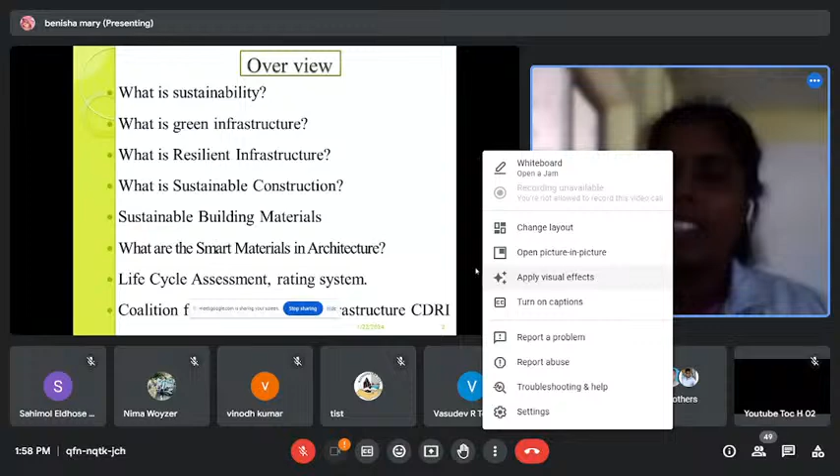As an overview for this presentation, I'll give some topics I'm going to discuss: what is sustainability, its definition and related terms; then we cannot have a sustainable field without nature, so I've included green structures and what is green infrastructure; next, what is resilient infrastructure and what is sustainable construction. When we learn sustainable construction, we have to know about sustainable building materials, and if it has to be resilient, we have to talk about smart materials in architecture. Finally, life cycle assessment, rating systems, and coalition with other related terms — everything I have planned to discuss.

So next, we can start with what is sustainability. As we are all familiar with the word, simply we can say that we are providing a base for the future generation, so they can experience and enjoy what we are experiencing and enjoying on this earth — clean air, clean water, and other natural resources. If we over-exploit the natural resources granted to us, future generations cannot have that. This is the aim behind concerned usage of natural materials.

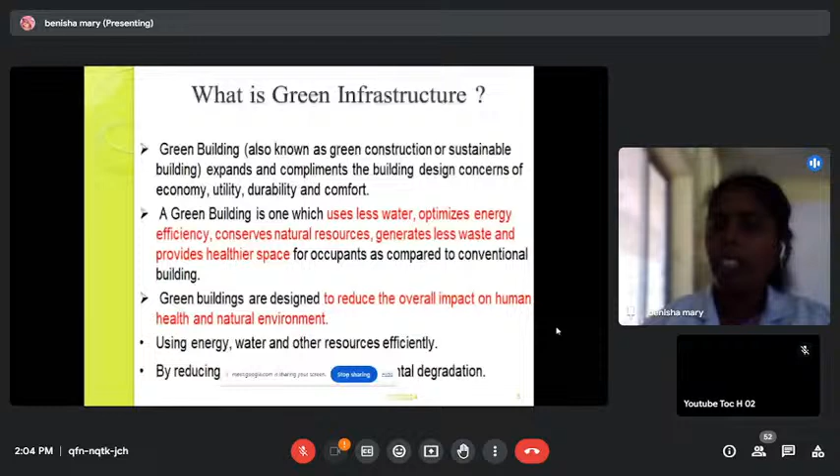It's not only our residential houses creating pollution - we have to think about industries and other infrastructures that are constantly polluting the land, air, and water. This is how green building impacts the environment. So while constructing, we have to focus on whether the building is affecting the environment.

During construction, we have to transport material from far places to the location, and we have to use fuels. During construction there will certainly be wastage of material, so we have to pre-plan how to efficiently conserve those useful materials.

And while doing that - occupation, then renovation. When retrofitting or renewing something, there also has to be a reduction in energy use. And at last, every building has some lifetime, and after that lifetime it's not possible to serve the function it was made for, so there has to be demolition.

While demolishing the structure, there will certainly be waste. So planning for that - how to recycle and do it efficiently - these things will make the building green.

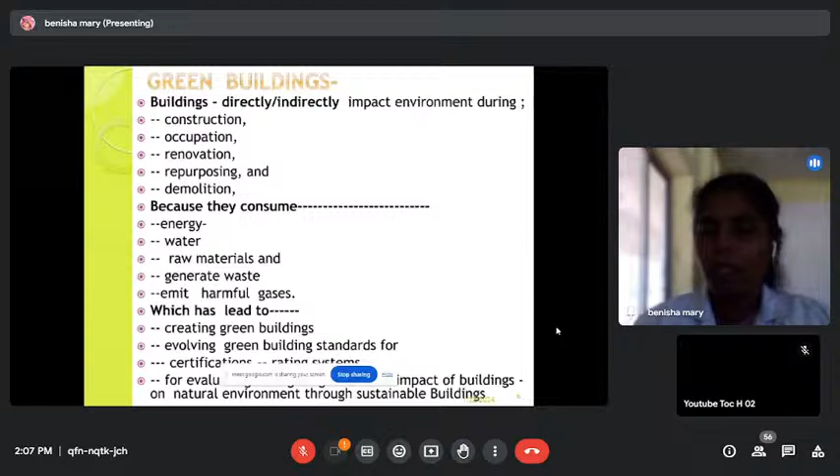When I say rating, it is LEED certificate - Leadership in Energy and Environmental Design. When we make a ranking for every building, LEED certificates are the famous one. There's also Green Globes, model green home building guidelines, and Build Green - these are all the standards. When we focus on this and build our structure accordingly, we can obtain a green infrastructure.

So next, the topic is not only sustainable green infrastructure - we also have to learn what resilience, or resilient infrastructure, means.

According to me, resilience is very important, because the structure, when met with a disrupting event, should not just fail suddenly. We have planned for its lifespan, so we cannot leave the structure to fail and collapse due to an event happening for a second, like an earthquake. If you plan for an efficient way of reusing, or mitigating the effects, that will be very good. So resilient infrastructure is something we have to concentrate on more in this current scenario.

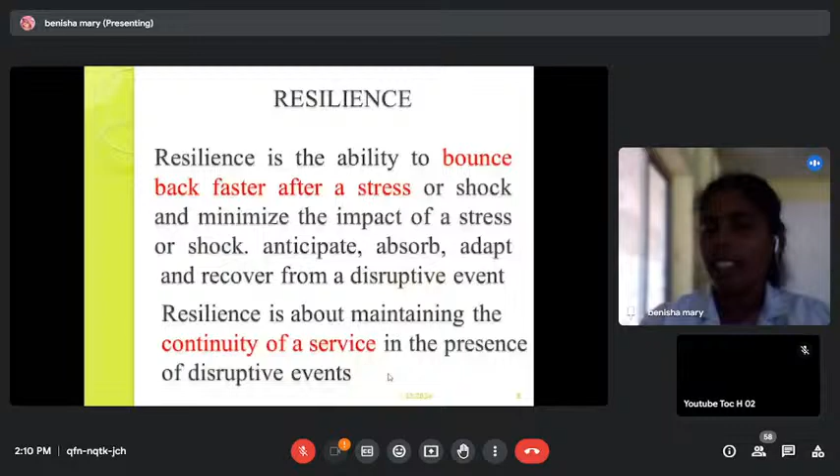Resilience is about maintaining the continuity of service in the presence of disruptions. So we are making the structure continue its function, staying safe from disasters. I will list what disasters are going to interrupt our structure. Those things have to be absorbed, and it has to react to its stresses. That is resilience.

Later on, if the stress is more, we have to make a way to protect - so it is not only preventing, we have to protect, then mitigate. Still, if it is not possible to protect and prevent, it must be in a way to reduce. These are all the things we can do before the disrupting event.

During the event, it should not fail or collapse. It should not lose its own stability. It has to respond - responding and reacting to the stress and shock which is happening suddenly is very important.

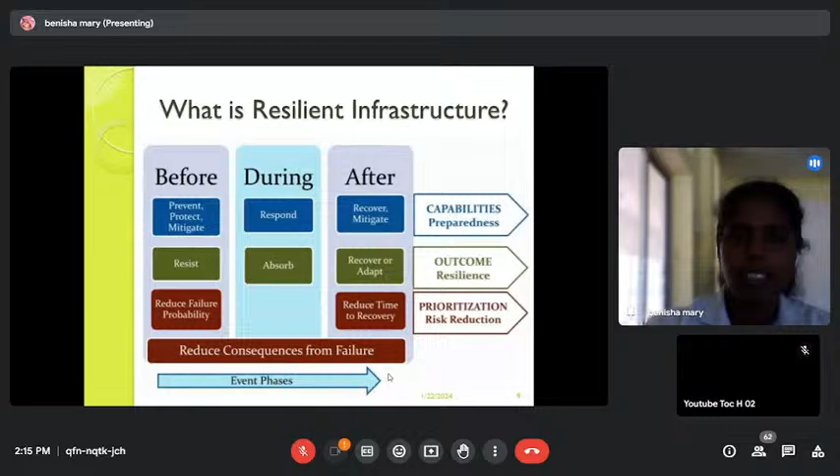Okay, now I can introduce some importance of sustainable construction. We are talking about sustainability, we are talking about resilience. So why is it important? Why suddenly do we have to change our traditional way of designing and constructing? Everything is going as it is, right? So why is it the time to think about a change in the way we design and implement a new construction or infrastructure.

Yes, it is certainly a critical time to think about our traditional way of designing, the usual way of mixing material and consumption. Everything has to be stopped, and there has to be some new thinking in infrastructure development.

So why is it important? It's about bringing a quality environment. We can have the air and water quality degrade, and then and there we are seeing a polluted environment with no possibility of rectifying it, and more human effect. It is giving an impact to our whole life. So what can we do as civil engineers to improve that or reduce the effect? Something has to be done.

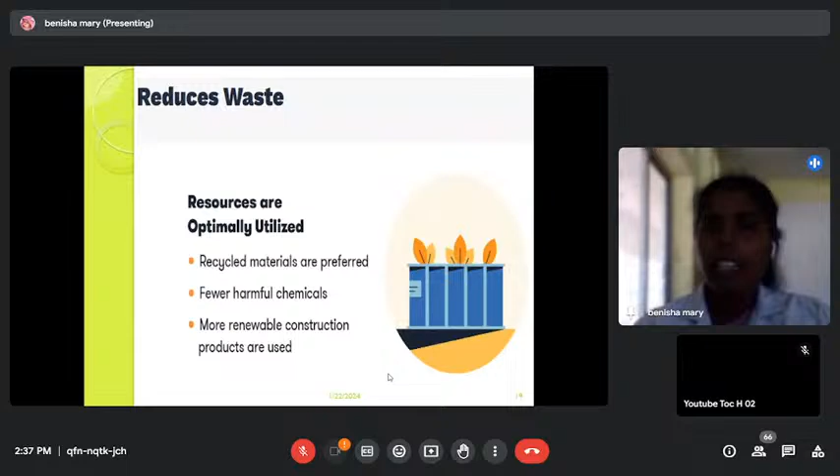Then reducing waste - the chemicals and toxic gases get reduced. Certainly we can improve the economy. How? Demand for labor increases. If an engineer is skilled in constructing a green building, a sustainable, resilient building material, certainly the demand for labor will increase, and we can boost the economy by implementing those projects.

Then it promotes sustainability - people can see how efficient everything is using renewable energy. It is promoted, and then we move forward in this stream.

As I mentioned previously, there will be a challenge when we change from the conventional method to a new construction method. So what is the challenge here? It focuses on taking time and preparation to utilize the best practice. It is not easy to learn the methods, or learn how it is designed, or how it can be used as a building material - it takes time.

That is the new trend. Everything has to be taught by us as teachers. As teachers, we can introduce those things to our students so that they will be benefited and know about these sustainable materials.

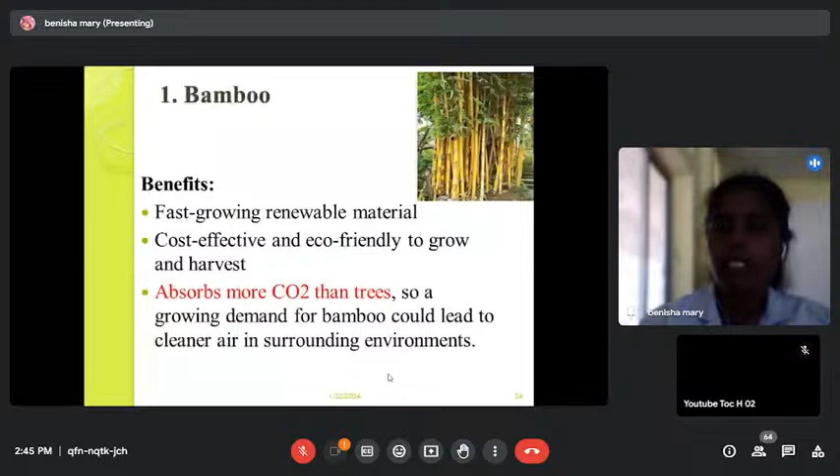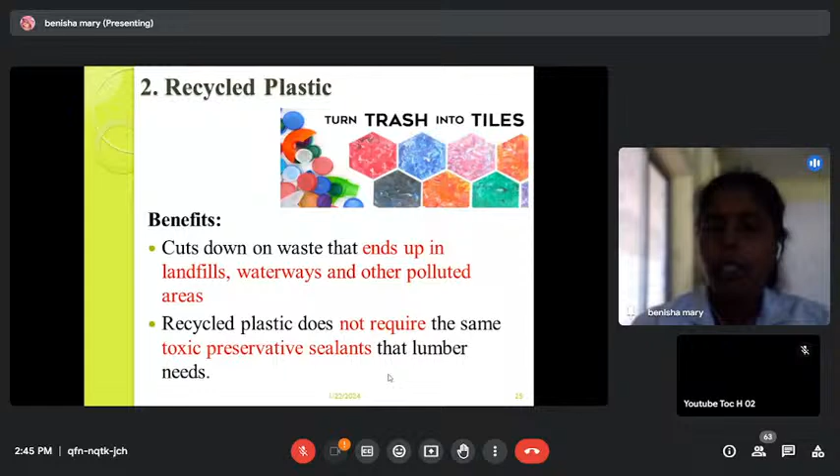Then recycled plastic. Here also we can end up filling the lands, we can end up polluting water with the plastic. It can be recycled. It doesn't require a toxic preservative or sealant to connect, so it is easy to connect and make a sustainable material.

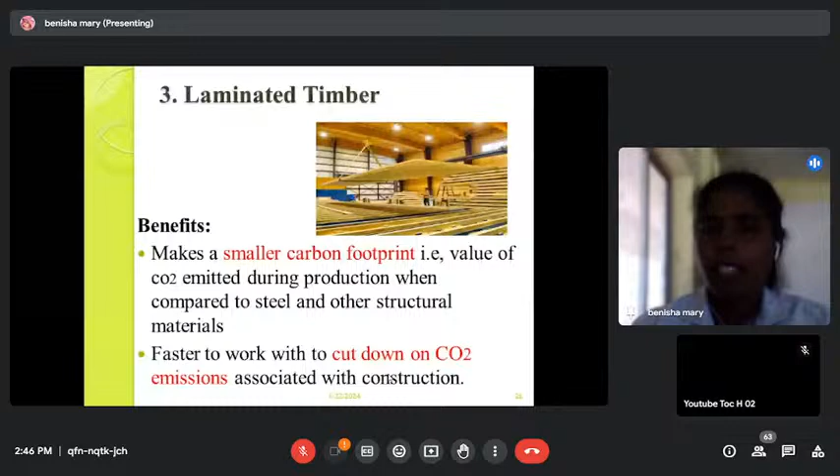So this is the laminated timber, we call that cross laminated. The strength of these timber blocks will be very high, so that we don't want to cut down the trees.

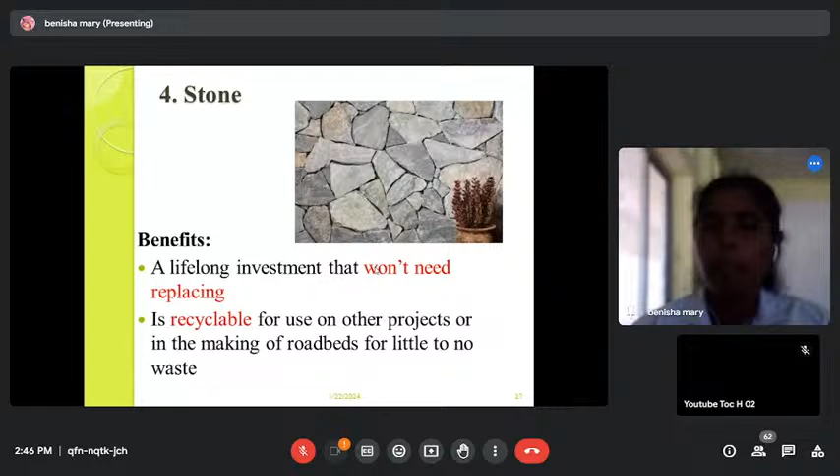Stone. What is the main benefit we can point out? It won't need replacing. If it is a brick or concrete, somewhere after years it is going to lose its shine or lose its surface particles. But stone is a sustainable unit, it will not need any replacing, and is recyclable for use in other projects. Once a compound wall made of stone is demolished, the same unit can be used as foundation blocks, so it can be recycled very easily.

I told about cob. It is a mixture of lime, sand, straw, and soil. It is inexpensive, produces less carbon dioxide, and you can see the units like a fresh mixture. That will help you with insulation also. It is an eco-friendly material.

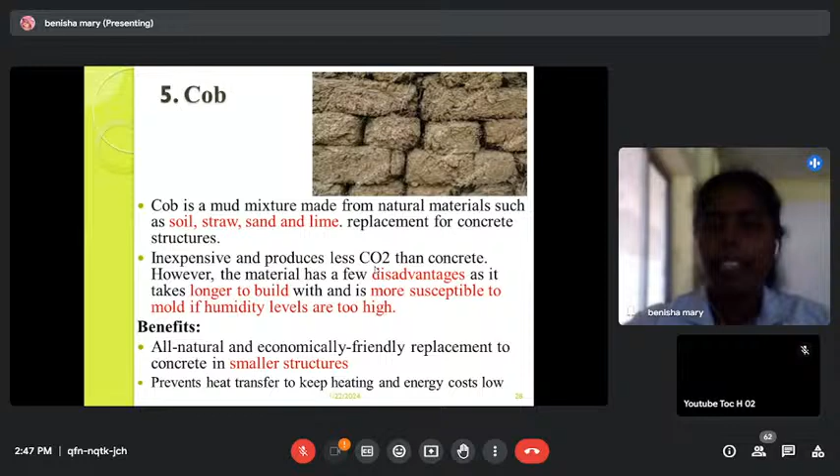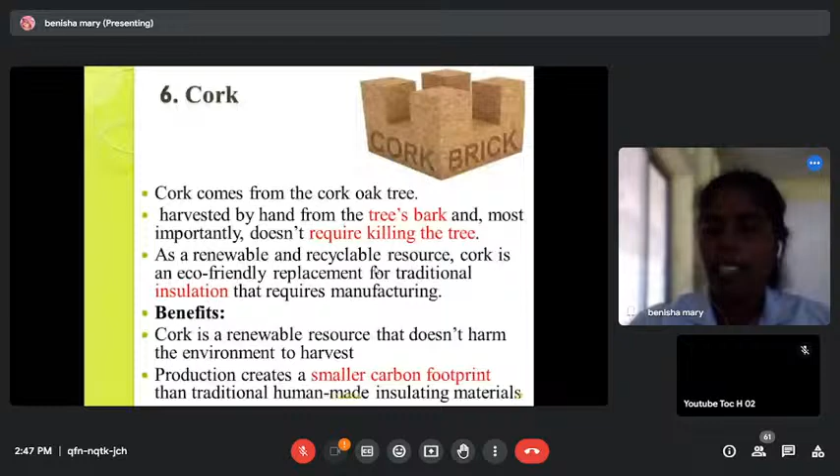The cork block bricks, the benefit we can say is smaller carbon footprint. The emission of carbon to the environment is very less when it is a cork, while production of a regular brick has high carbon footprint, it has to be burned in flame, treated, uses water, everything is made. But this cork is weightless, so it can be used for a less weight building material. Then adobe brick is also the same, the mixture is dried in the sun and those blocks don't need any heating.

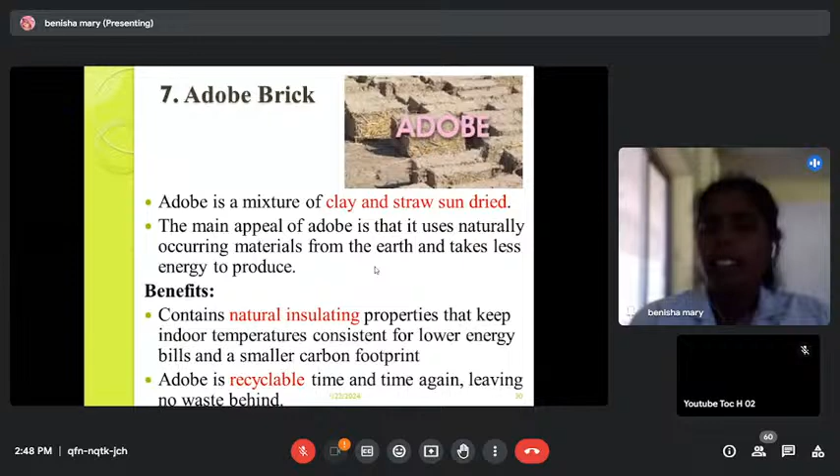The benefits we can say are natural insulation property and keeping the indoor temperature consistent. So when we enter into a hut or an olden clay walled house, we experience a good condition, the indoor temperature will be very less, but we couldn't sit inside concrete high-story buildings. It is all because the insulation property of this concrete is less, but it can be achieved by adobe bricks.

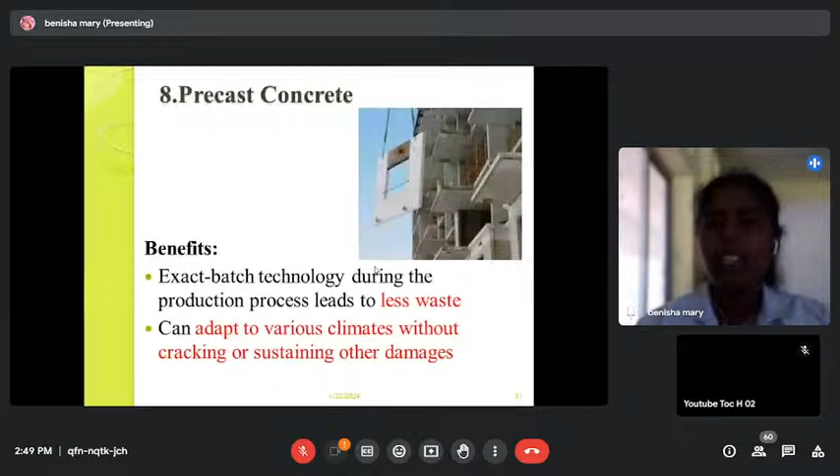Precast concrete: we have to cast the elements somewhere in a factory or laboratory, then at once we can build it to the required shape. It can be transported and then uniting it into a block is possible.

Then pollution absorbing brick. This brick will absorb the pollutants, the small particles mixed with the air. So that will give a good space for the inhabitants.

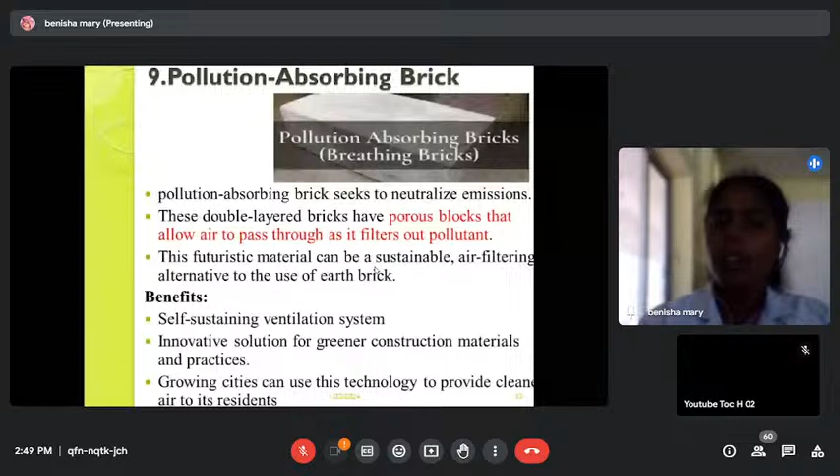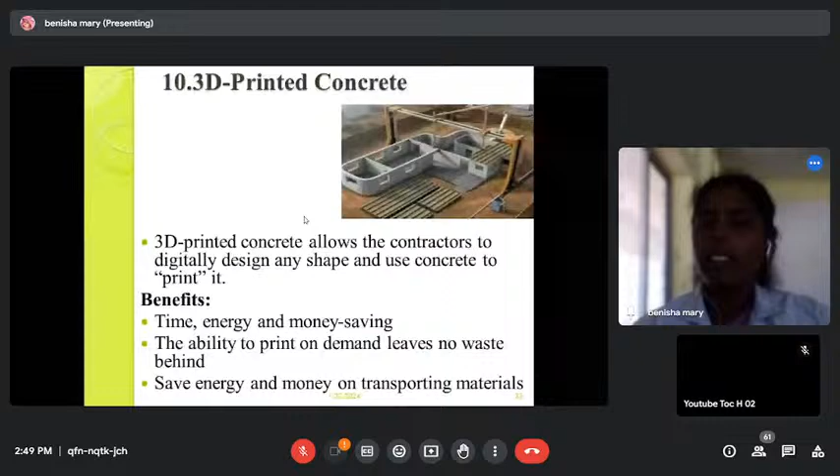Then this is the 3D printed concrete. So you don't have any wastage of material. It is all done in less time, saving money, the energy, everything is less. It has the ability to print on demand, leaves no waste, saves energy, saves transporting material. We don't want to walk here and there to transport, purchase, nothing. We can just design and then give time for it to build.

So this resilient material can be added in the smart material category also. These are some of the new materials I have listed here, which work very smart, very resilient for the stresses. So one by one we can go through it.

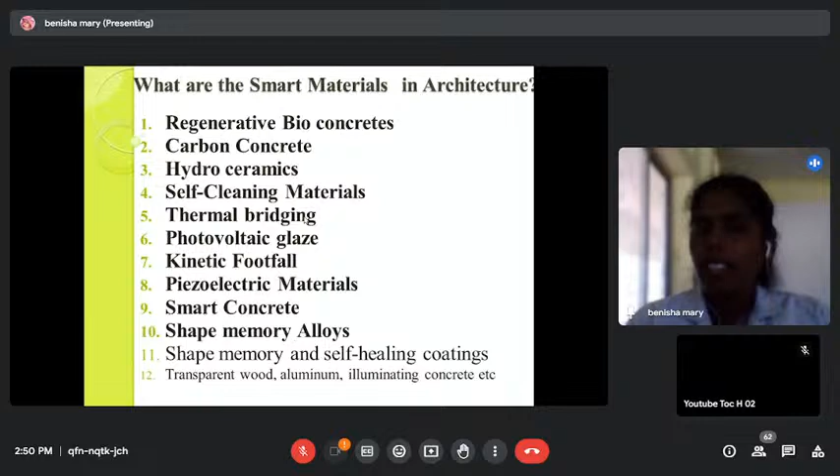Regenerative bioconcrete, or living concrete, we can say. So how to make the concrete live? By mixing a bacteria called bacilli. So what is the need of a bacteria there in concrete? We know concrete is a brittle material.

It is prone to cracking and shrinking, so there will be cracks. Crack is the main ill effect it is giving. So how automatically can the major and minor cracks be filled? Even a micro crack, not at all visible to us, what is it going to do? If it is cracked, it allows moisture content, water, everything into its medium. What will that cause? It will cause corrosion to the reinforcement embedded in its matrix.

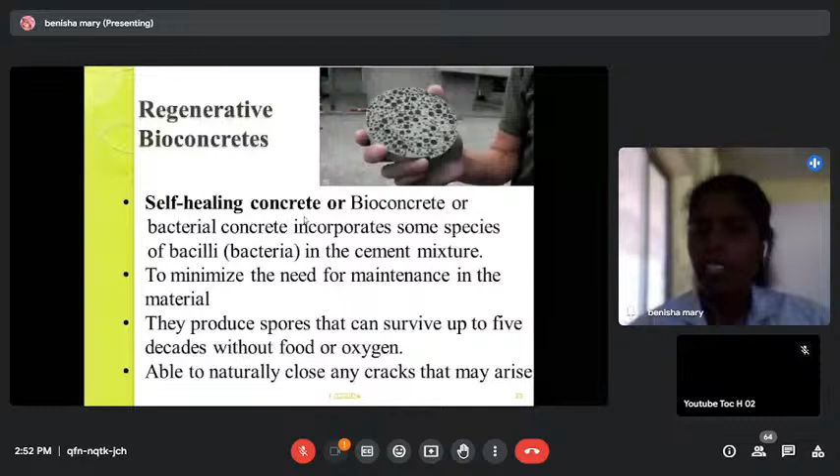So how can this automatically be fixed? There is a bacteria which is going to help us by creating lime, which is going to fill the micro cracks created then and there by stresses inside the concrete. That is a good one we can use as a sustainable material. It will survive for 5 decades without food and oxygen. We can think about implementing these things in our future projects.

Next is carbon concrete. Here we are using strands, fibers made of carbon. These meshes we can use instead of iron elements. What is the main benefit of ignoring iron elements? The reinforcement gives high dead weight to the structure, so the self weight of the structure itself is a big task to manage. When the self weight of the structure is brought less, what happens? The strength of the structure is going to be compromised. So what to do in order to have a strong building element that also serves its function, holding heavy live loads, dead loads, wind loads, earthquake loads?

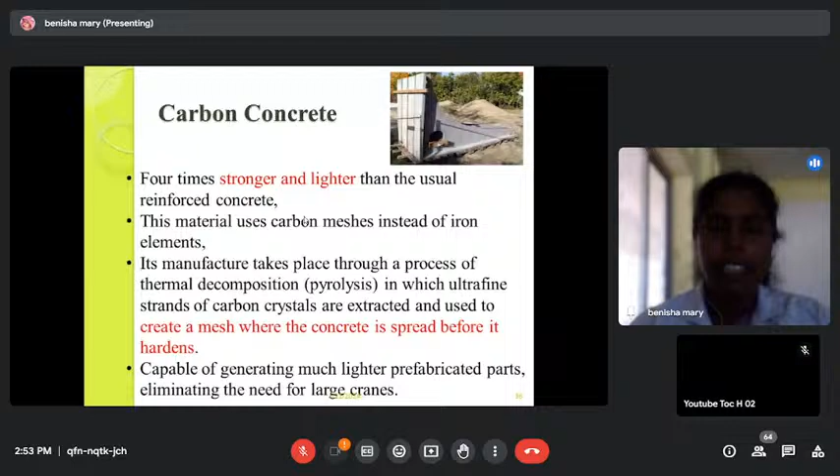So there is a material made of carbon. These carbon fibers are made with the concrete, as a mesh we have to spread before hardening, so that this material will help us make a sustainable concrete. The carrying capacity is also good, and the thickness of the elements can be brought lesser. A big dam you are going to construct, a bridge you are going to construct, there is no need to fear high thickness or diameter - it is possible with fine elements.

Then hydroceramic. There are more trends implementing hydro, water. Water particles can be absorbed by this concrete - it is mentioned that 400 times more than its volume of water can be absorbed by this concrete. So what is the use of absorbing water or wetness? It can be served as a thermal insulator.

When the surface is very cool, the structure does not require comforting energy which depends on power, such as air conditioning or a fan. So those things will be less needed when it is made of a hydroceramic material.

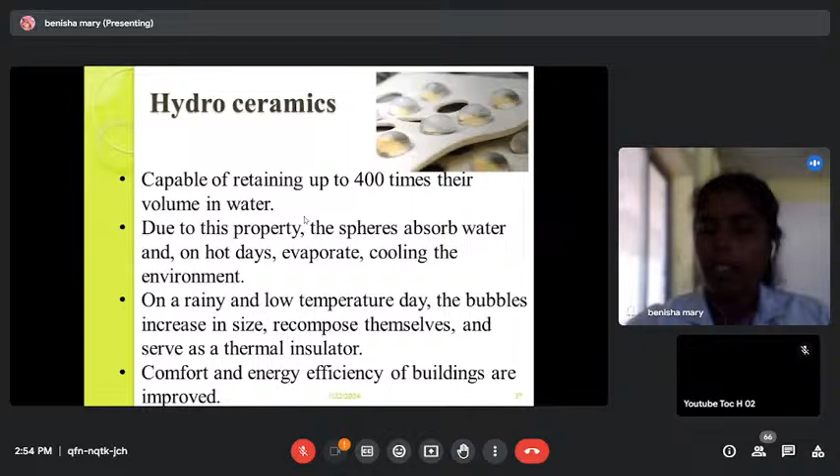Now let's talk about self-cleaning materials. Is it possible for concrete to clean itself? Yes, it can be done by adding titanium dioxide. When titanium dioxide ions react with particles in the presence of sunlight, it emits nitrates. These nitrates can kill or absorb the dirt and improve the surface process. This has been implemented and proven to give a 51 percent reduction in polluting gases. It can also be applied as a paint on the surface of concrete so that the structure becomes dirt free.

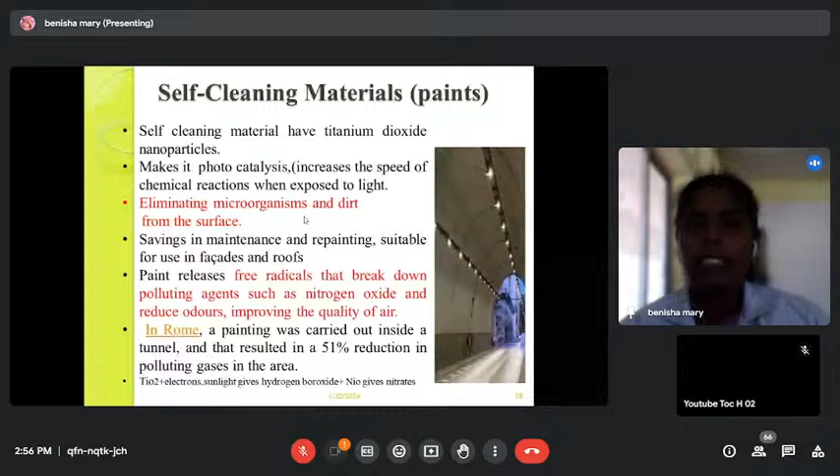Next is thermal bridging. What is thermal bridging? The sun's radiation troubles us a lot - we get heat inside immediately when radiation contacts the surface. Is there a possibility of limiting it with an insulating material? Yes, that is thermal bridging.

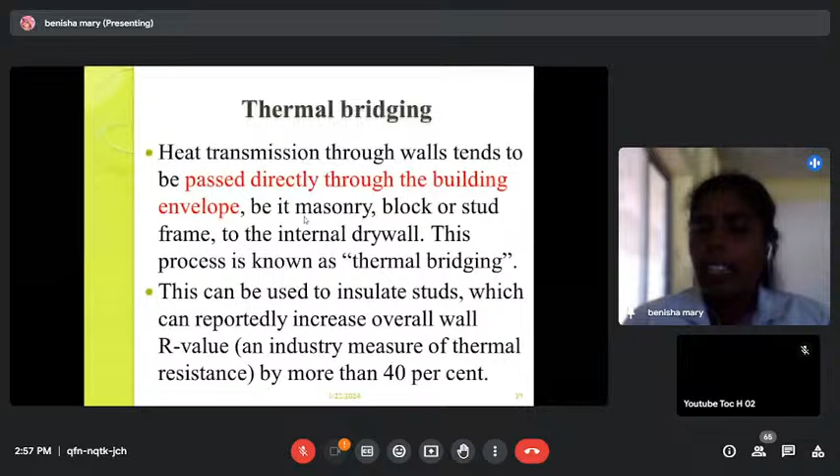Thermal bridging works as a layered element, with two or three layers. One layer is made of insulating material, and between that and the first layer there is some free space. This free space does not allow the radiation to pass into the indoor space. So that is a benefit, and here the R value, the thermal resistance value, can be increased by more than 40 percent. This is the thermal bridging element.

Next, photovoltaic glass. Why do we adopt glass? In order to allow light to pass while not letting hot radiation pass. The heat is absorbed by solar panels, and it can still be made transparent. We can make this photovoltaic glass very transparent so it does not allow heat to transmit, but that heat is used as efficient energy for producing electricity. This is practiced in many useful structures, done in windows, facades and roofs, making sustainable use of this glass.

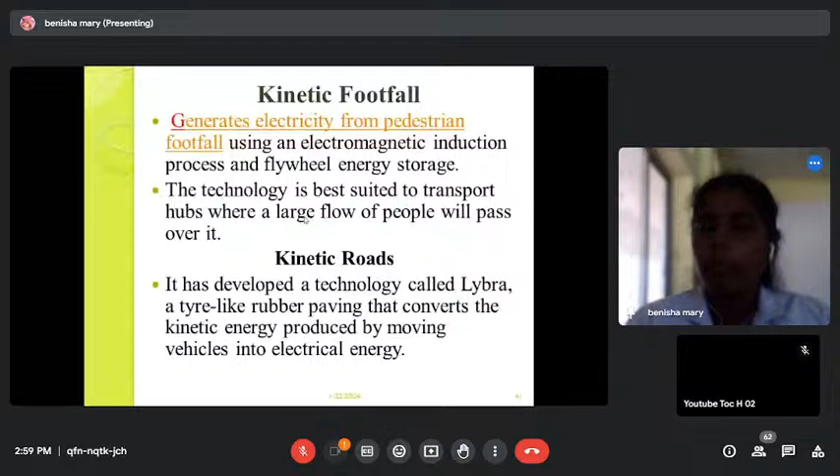Next is kinetic footfall or kinetic roads. The load given to this material is converted to electric energy - it generates electricity when we pass by. Vehicles passing on a road made of this material automatically generate electricity, which can be used as a street light source or for recharging electric vehicles. So when used as a road material, it can certainly function as an energy producing unit.

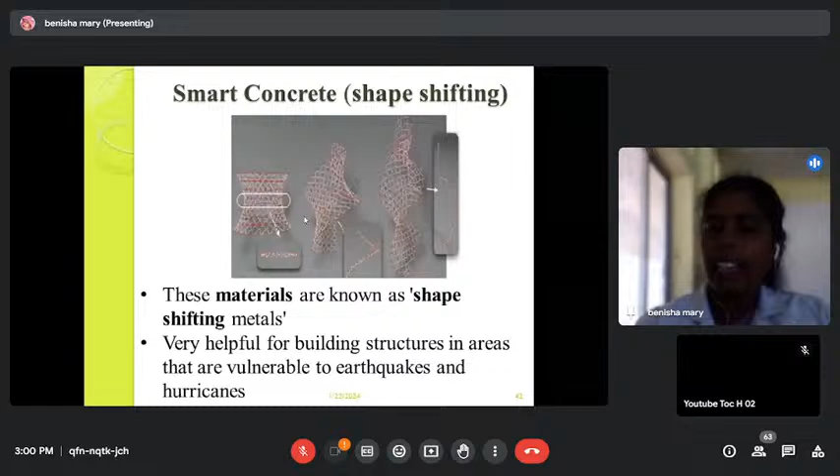Next is smart concrete. We call concrete smart when it has the property to change its shape. This shift is not made frequently - it happens when meeting a heavy force or heavy wind. Such things can make the structure shift, so it can efficiently handle wind pressure and wind load when its shape changes, for example to a cylindrical form. It automatically senses forces or loads and is molded or changed to a shape that can deal with adverse environmental disasters. It is implemented in earthquake-resisting areas or hurricane-prone areas, where it is effectively used.

As mentioned about concrete producing electricity, that can be used effectively. Concrete can also be smart when the original raw materials are added with potassium ions, giving it a capacity to store electricity for a long time. What they propose is that one day an engineer can build a wall which can store a lot of energy and be used as a battery to serve power needs.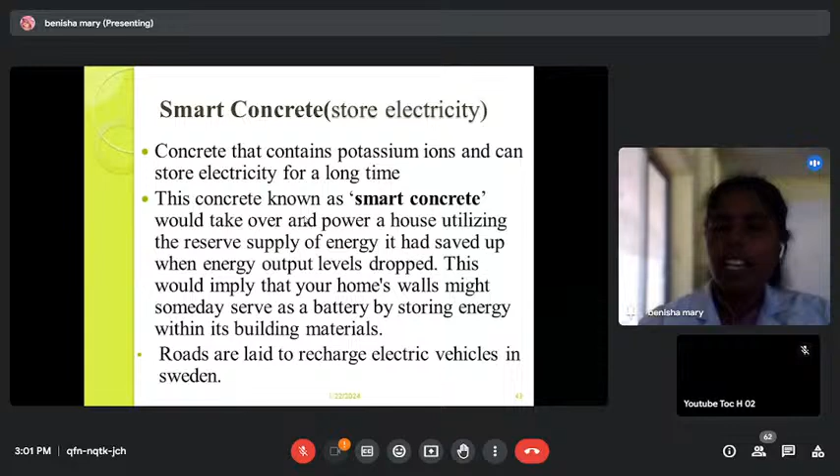Okay, it is all possible. So that is a smart concrete.

Then shape memory alloys, a resilient material. These alloys are a mixture of metals. So here we are using Nitinol, nickel-titanium, copper, aluminum.

We have heard about base rollers, so base isolation materials. When these materials are adopted at the foundation, they will change shape as needed and regain the original shape when sensing normal temperature.

The material can sense temperature, humidity, pH level, light, wind, and stress. With this effect, they have the capacity to change themselves, which will be a useful material for us.

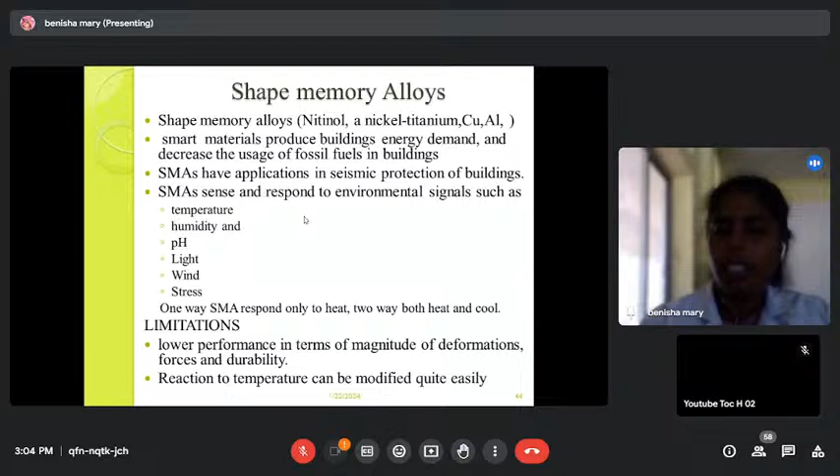Next is the reaction to temperature can be modified quite easily - it is much more difficult to control the response to temperature. So that can be added as a limitation. This is all about shape memory alloy.

And when the temperature gets normal, what happens? It will memorize its previous shape. What is the previous shape? A horizontal one. So it automatically goes back to the original shape.

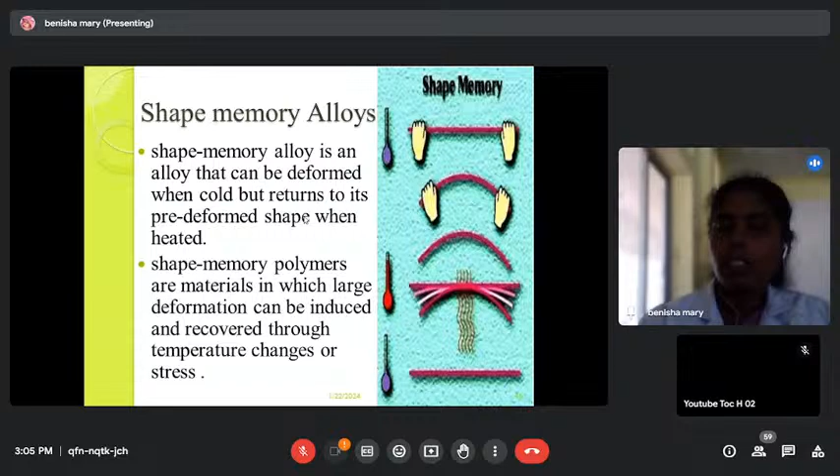So that is going to be implemented as a sustainable material. How is it effectively used in our field? What effect do we experience in concrete? It goes cracked.

So those cracks in the concrete can be restored when we paint or coat this shape memory material over the surface of the ordinary building unit. This is much more helpful when it is added with an elastic polymer network. It is possible for the structure to reform and come back to its original natural state without any cracks, made possible by the self-healing material.

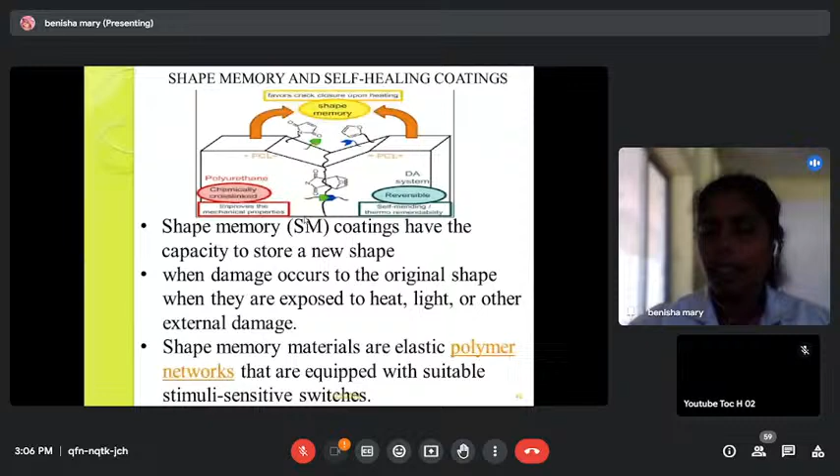So here they are giving an example of an automatic material, that is shape memory alloy material. It is used as a...

...shoe. So when we want to wear the shoe, the temperature has to be increased. What will happen when the temperature is increased? The element gets loose and it can be worn like a sock - a flexible one when it is heated.

Later, when it continues with our own climate and body temperature, it becomes rigid. So when a flexible material becomes rigid, it acts as a rigid shoe. Later, by increased temperature, it will be flexible again - it will again have the capacity to be flexible.

So such kind of innovations they are making with these smart materials. We can also implement this in our civil engineering projects.

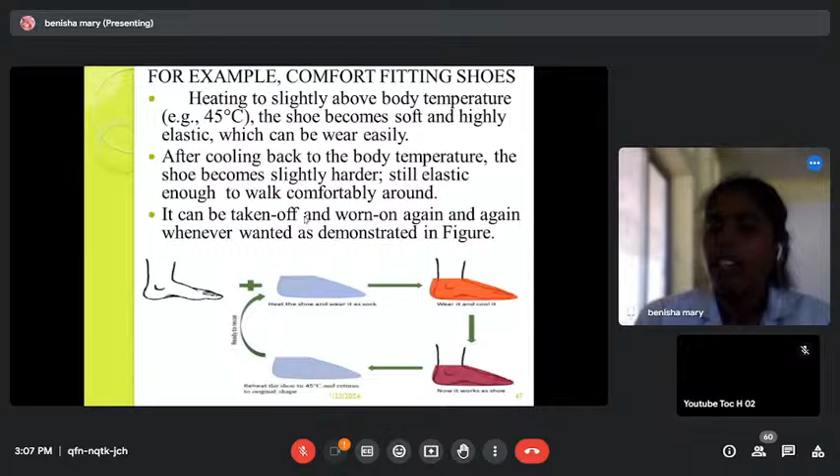Yes, so it is time to discuss about life cycle assessment. So what is a life cycle assessment?

That is, it is analyzing a material. So if I am suggesting some green material like an adobe brick, we have to analyze what are all the raw materials here, how it is extracted, how we have to transport it to the site, how we have to build it, how we have to produce it, and then what is the lifetime, and after its lifetime, how it is going to be demolished. Why demolishing? Is there any impact to the environment? And is it possible to recycle the material?

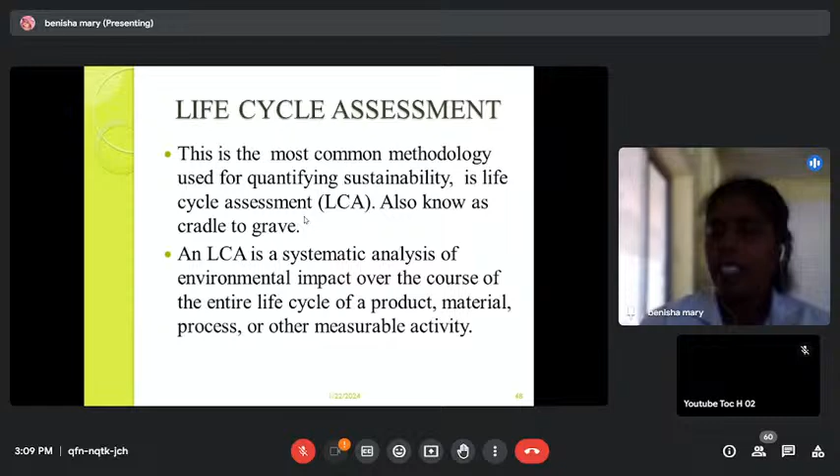So if you are fully analyzing the material starting from its origin to its demolition stage, then it can be rated. Based on the impact the material gives in each and every phase, it can be rated. So the material which gives less impact scores more, right?

So here a flow chart I can show you. This is a cycle of a material that repeatedly happens. The first thing is raw material is extracted. Then the material is produced - it can be produced as an I-section or element. Then it has to be manufactured. Then it has to be utilized. After the period of its service, it has to end its life. Then afterwards, it has to be recycled. So analyzing all these terms, then we are grading a material - that is called a life cycle assessment.

I can compare brick and adobe blocks. So while comparing the LCA of brick, what happens? We have to collect the clay material and use a lot of water. Then it has to be burned. So the carbon footprint or the usage of fuels, everything is more. And then after the service, it cannot be reused, right?

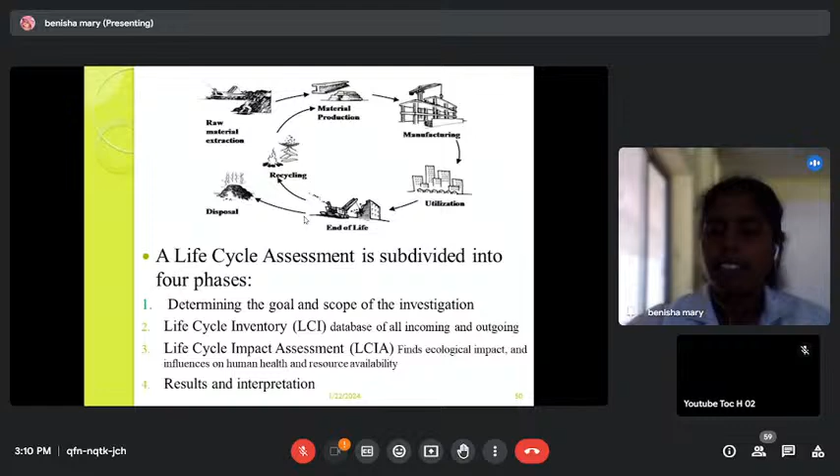So what is the output? The output is the emission of air, the emission of water, the emission of pollutant to the water, emission of pollutant to the land. So these are all the input and output. The input has to be used less, and the output has to be released less.

Is it during the cycle? What is that extraction of raw material? If iron usage is more, mining is needed. In order to get the ore, metal iron ore, we need extraction - the energy used is much. Next, processing - while purifying the iron, the processing is more. And then it is not available everywhere, it has to be transported a lot using diesel fuel for the transportation vehicle.

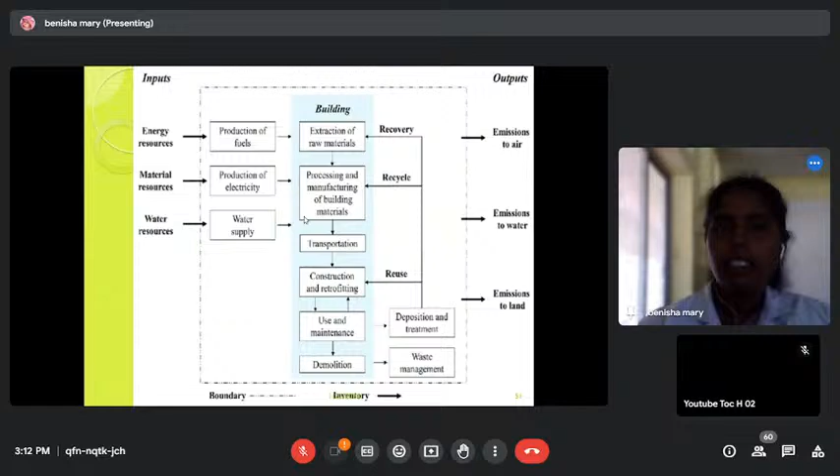Next is construction and retrofitting. So when we cut the material, there is wastage - it is not available in the required size, right? So there is construction and retrofitting wastage. Then the maintenance - it is not easy to maintain the iron element, so we need much more cost and time for maintaining, and at last, demolition. If it is easy to recycle, it is well and good, right? So this shows the life cycle assessment cycle.

Here we can discuss some principles - the outcome principle and the process principle. The outcome principle, we have to think about social, economic and environmental effect, right? And process principle, we have to think about the ethical, stakeholders and governance. So all this has to be kept in mind, and at last the performance has to be harmless - preventing harm, preserving correct values, creation of positive and restorative values, right? So all these principles are going to give us a material which is effective in its performance.

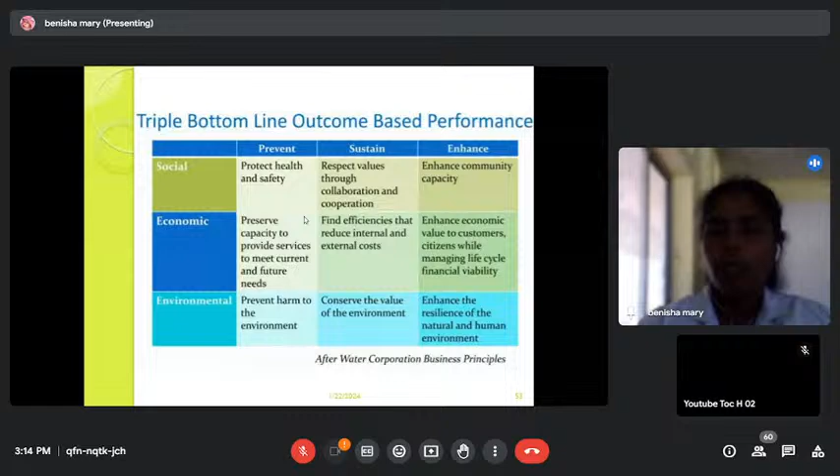So here the triple bottom line is based on the outcome based principle. We are focusing on social, economic and environmental elements, right? So how to prevent, how to sustain and enhance - it is all done.

Then the next will be based on the input basis, right? So here, ethically we have to think while preparing a material whether we are ethical to the ecological elements, right? And governance - is there any risk in managing or risk in promoting? Those things we have to check. And stakeholders, it is also important, right?

So it is sustainability metrics. When we think about the economic aspect, there is funding and land value. Do we need to encroach on the land, what is the cost, everything we have to suggest. And certainly the environmental terms like quality or compromising with the pollutants we are producing.

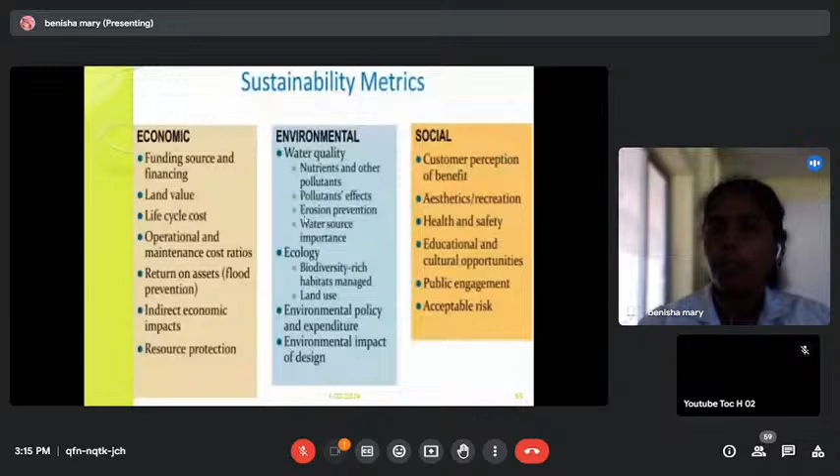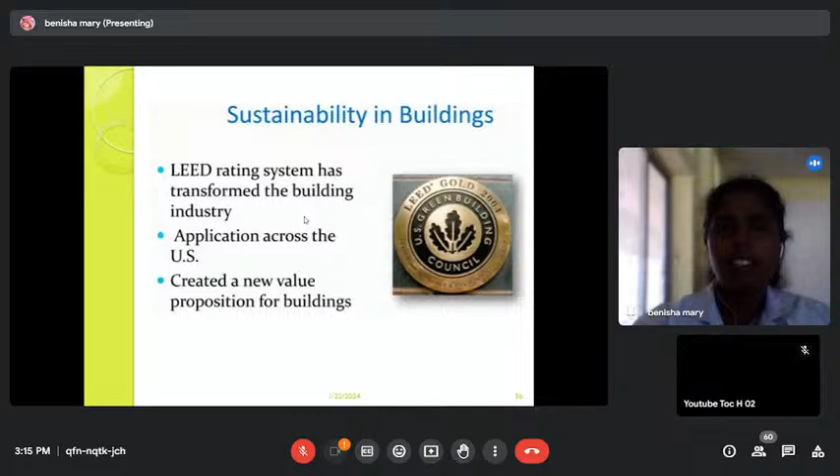How are we encouraging elements which are produced in a sustainable way? As we discussed previously about the LEED rating, when the material is performing good, the rating for our infrastructure is good, and we get reputed by the government and other organizations. So here, the green building or the sustainable building, how it is rated.

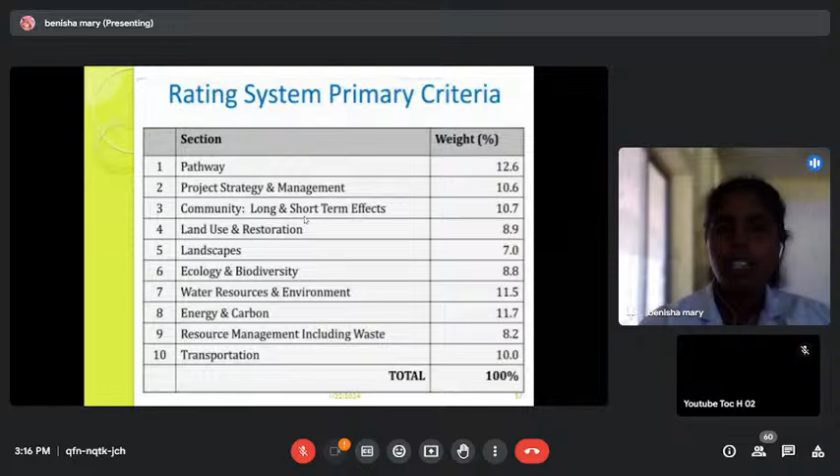When we give importance to the pathway, what percentage of weightage do we get? When it is for water resources and environmental concern, how it is made, those things will also give some weightage for our performance. If the building is getting 100 percent weightage, it is perfectly good, and we can try to score weightage for our building which is produced based on sustainable and resilient materials.

The government is also helping us to promote sustainable and resilient structures. They are planning for buildings which are sustaining and responding to events.

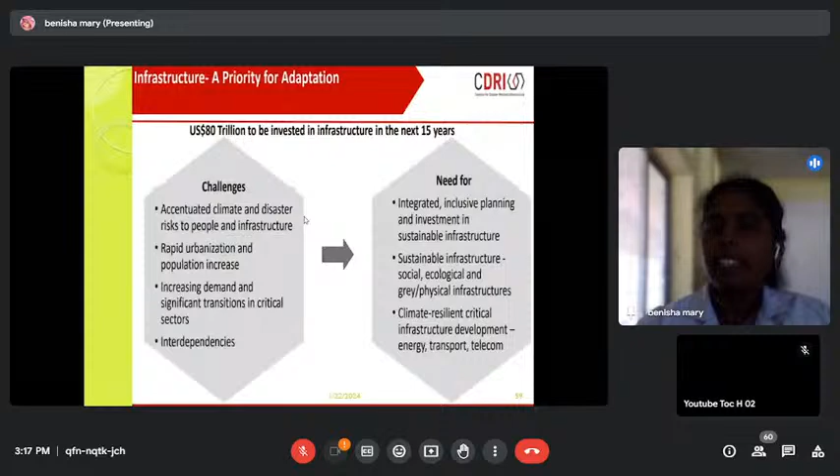What I can share is in the recent summit on 23rd September 2019, the government planned to invest a lot to make infrastructure resilient, and it is going to contribute to economic growth. They have a plan to invest 80 trillion dollars for building such sustaining structures in the next 15 years.

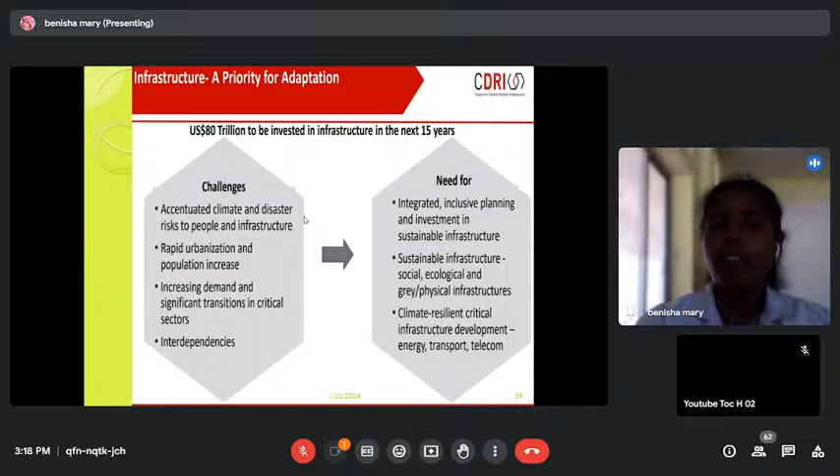So it is good news for all our civil engineers who are thinking of making a project with sustainable designs. It is good for us that the government is also making the environment beautiful, and here comes the resilience of a structure.

What are all the risks the structure is going to face? It is not only natural disasters which disrupt us. We don't want to focus only on earthquakes, hurricanes, cyclones, or tsunamis. It is not only that - artificially made things can also trouble us. We have to frame for being resilient for these issues also.

What are all the issues? For this instantaneous situation, it is not possible to live without power. Power is needed for illuminating the indoor, or for making comfort. For operating every machine, it is all reliable on power. So when there is a power cut or loss of power, how do we have to behave? That is also a structural event which is going to affect the infrastructure.

The next is communication. We need internet communication, we need telephone communication. Is it possible without conventional power or conventional fuels? Everything has to be done naturally. When it is a green building, a sustainable building, without any extra power supplied, we ourselves can produce. That is a sustainable building which has to be appreciated.

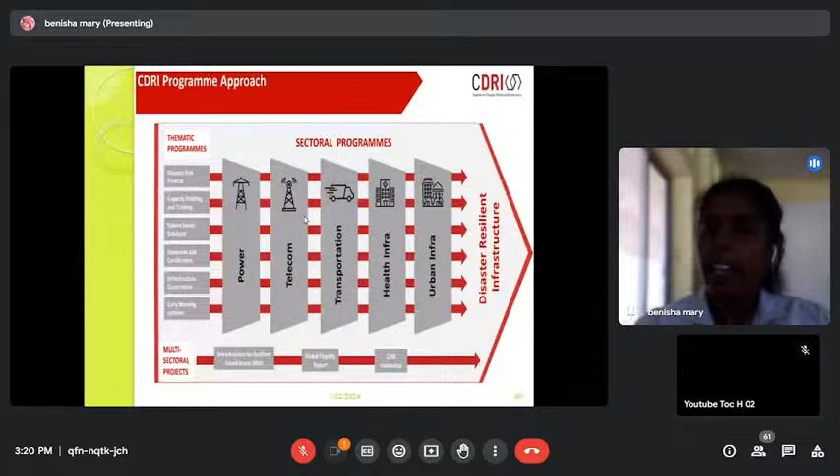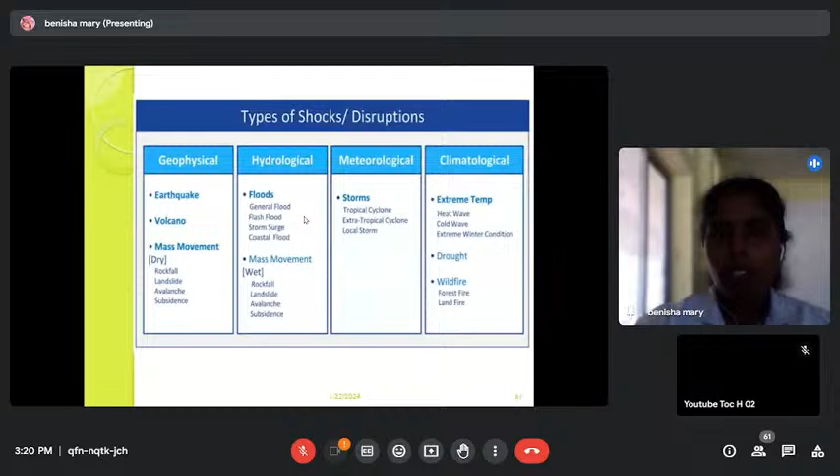And transportation, health infrastructure, urban infrastructure - these are all disasters they are listing. You can also have natural disasters like earthquake, volcano, and mass movements like rockfall and landslides. The structure has to be in a position to respond and react to these disruptions. Not only geophysical disruptions, but hydrological disruptions like floods, meteorological disruptions like storms and cyclones, and climatological disruptions like drought, wildfire, and extreme temperature.

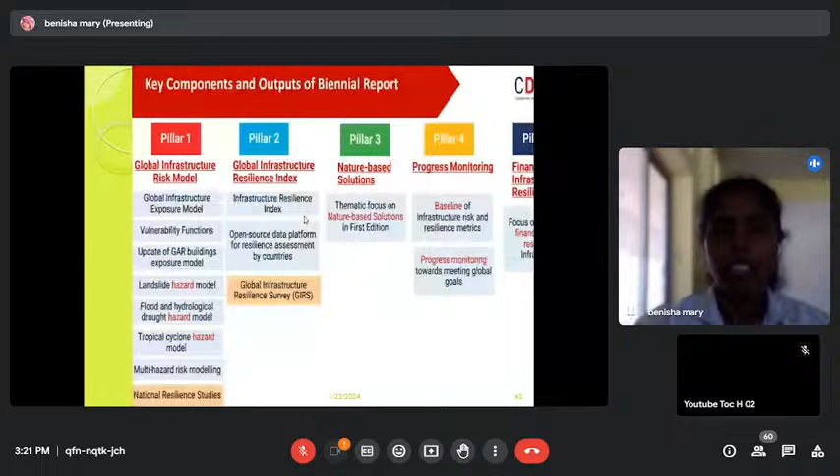So before that, we can have ideas about sustainable materials, sustainable benefits, and then we can go hand in hand with these natural elements. I hope this presentation was much helpful for you all, and I have shared my views on modern, sustainable, and resilient materials. Thank you.